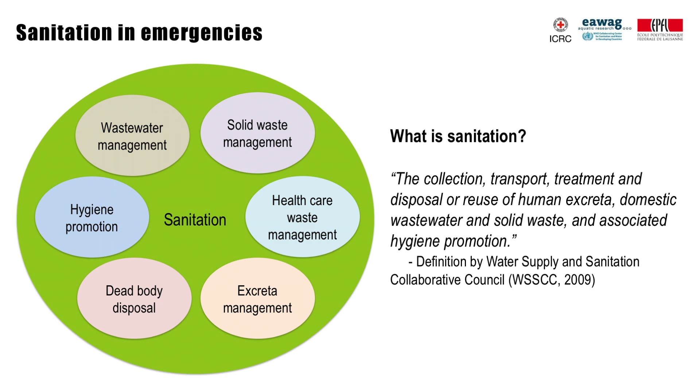There are several different subgroups of sanitation during a humanitarian response, including wastewater management, solid waste and healthcare waste management, excreta disposal, dead body disposal, and hygiene promotion. The definition of sanitation by WSSCC considers excreta, wastewater and solid waste management as part of the sanitation domain. In these modules, we will focus on wastewater management and excreta disposal, meaning all sanitation domains linked to the waste disposal from the use of toilets.

During an acute humanitarian crisis, the protection of public health is the main goal of sanitation. A public health crisis in the form of a cholera epidemic or other feces-related diseases must be avoided. Conflicts of interest between public and environmental health can arise. For example, vacuum trucks might dispose untreated fecal sludge into the environment due to the lack of treatment facilities, in order to get it away from settlements and protect human health.

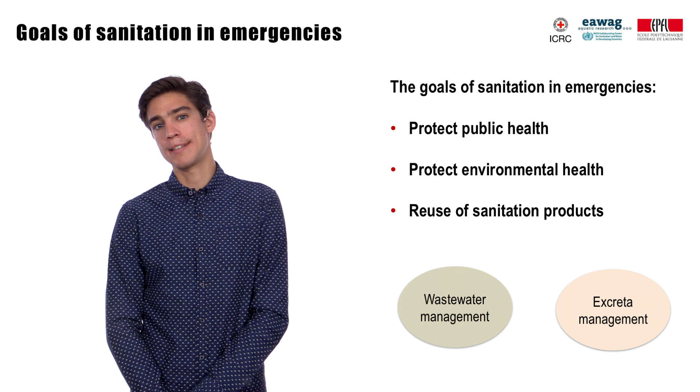While this practice can be justified during an acute humanitarian crisis, the protection of environmental health, along with social, institutional, and economic considerations, should not be overlooked and should be addressed as soon as possible or even integrated from the beginning. Finally, the reuse of sanitation products can become a goal during the post-crisis when new systems are implemented.

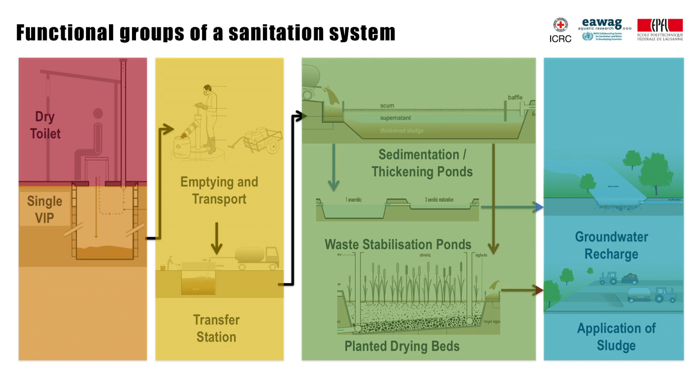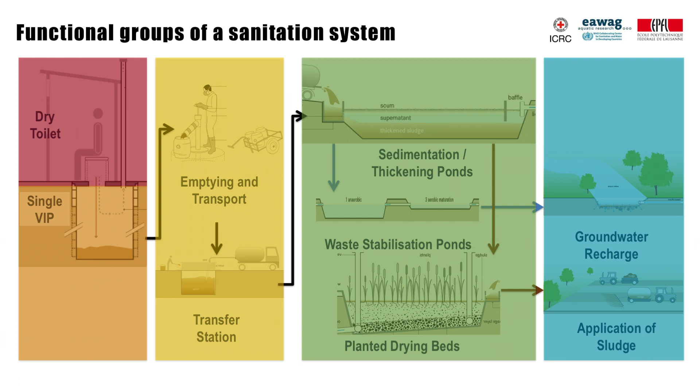In the Compendium of Sanitation Systems and Technologies, we categorize all sanitation technologies into 5 different groups with the color code as seen on the image. A sanitation system always consists of a combination of technologies from several or maybe even all of the 5 different categories. The first functional group is called user interface, meaning the toilet itself, so the interface between the user and the rest of the sanitation system. This can be a dry toilet, a flush toilet, or a urine diverting toilet.

Sanitation products have to be collected and stored on-site in some systems. Therefore, the name of the second functional group indicated by the color orange. There, some treatments can already occur. A widely used technology from this category is the septic tank. In the septic tank, some physical separation of sludge and effluent occurs and some anaerobic degradation. Once the collection technology is full, the sanitation products need to be emptied and transported. This yellow category is called conveyance.

All sanitation products need treatment. Thus, all treatment technologies are categorized in the 4th green functional group, and finally, they can be safely reused or disposed, as indicated by the blue functional group called use and disposal.

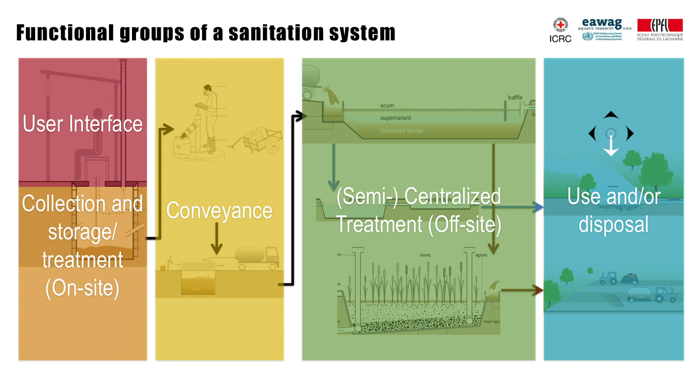During a humanitarian crisis, resources are limited and sanitation systems break down, are inexistent or have been destroyed. It is therefore not feasible to implement a complete sanitation system from the very beginning that takes into consideration all functions. The Sphere standards provide guidance on the minimal standards for excreta management during a humanitarian response. This can help to set priorities and provide minimal services.

There are 2 standards for excreta management in the Sphere guidelines, which we will have a closer look at. The first goal of excreta management is to create an environment free from human feces, meaning that all living areas are free from fecal contamination. The first key action is to implement appropriate excreta containment measures.

With the lack of resources, this can mean a cleanup campaign, the demarcation of defecation fields, and the construction of public toilet facilities. All of these actions have to be implemented in consultation and coordination with the affected community, as they have key information from the ground and will be the ones to use the facilities.

Sanitation facilities have to be constructed away from water sources and not too close to the groundwater table. Locations downstream of rivers or at the bottom of a slope are therefore preferred. The second minimal standard in Sphere is the safe containment of excreta. The standard says that all affected people should have adequate, appropriate, and acceptable toilets sufficiently close to their living spaces to allow rapid, safe, and secure access at all times, day and night.

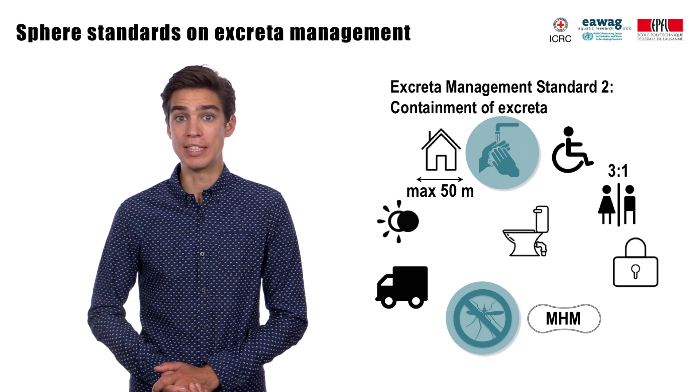Furthermore, it has to fulfill basic hygienic functions such as the possibility for menstrual hygiene management, at minimum through the provision of water and a solid waste bin with a lid. Also, hand washing facilities and avoiding that the toilet becomes a breeding nest for flies and mosquitoes is needed. It should be ensured that the toilets can be emptied when full and that transport, treatment, and disposal or reuse of sludge is warranted. Toilets should not be a source of groundwater contamination.

For public toilets, there should not be more than 50 people per toilet in a female to male ratio of 3:1. However, the goal of any long-term intervention is to provide household toilets which are organized by the community themselves. Many prolonged humanitarian responses require an action plan that goes beyond quick fixes and immediate interventions. A long-term action plan is needed after immediate actions were implemented.

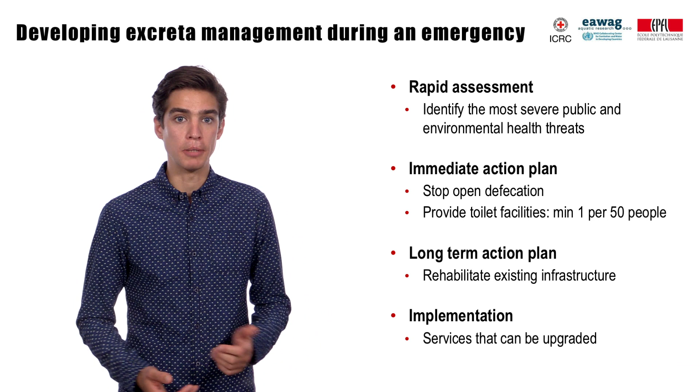This includes the rehabilitation of existing infrastructure or the construction of new ones. Implementation can be done stepwise with services that are upgradable. Constant monitoring is required in order to assure the success of the steps. Especially in the acute phase of an emergency, public and environmental health threats need constant surveillance. The data for monitoring can be gathered through community surveys, observations in the field, and expert interviews.

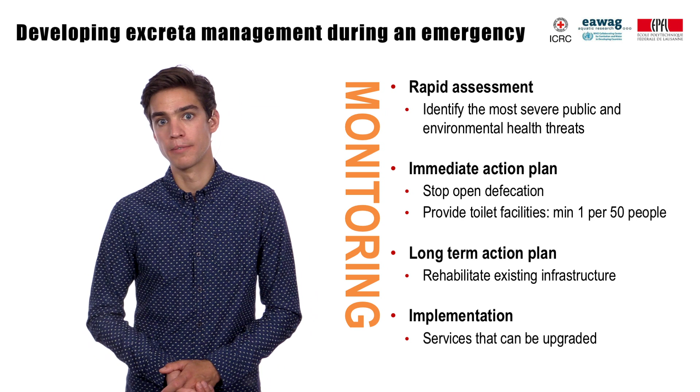As mentioned before, sanitation systems have to fulfill different needs during different phases and types of a humanitarian response, which can require different technologies and services than those needed at a different stage. During chronic crises, these different phases cannot be distinguished and several interventions might have to be implemented at the same time. In the following example, the goal is to show how sanitation systems can be developed over time.

This fictional example of an armed conflict forces a city's inhabitants to flee their houses and resettle in an isolated rural area. Water supply is not yet provided, and the first goal is to provide a quick fix sanitation solution that serves a large amount of people and that safely contains excreta from human contact. The proposed first step is to implement public shallow trench latrines together with hand washing facilities next to the latrines so that the first standard of Sphere can be fulfilled.

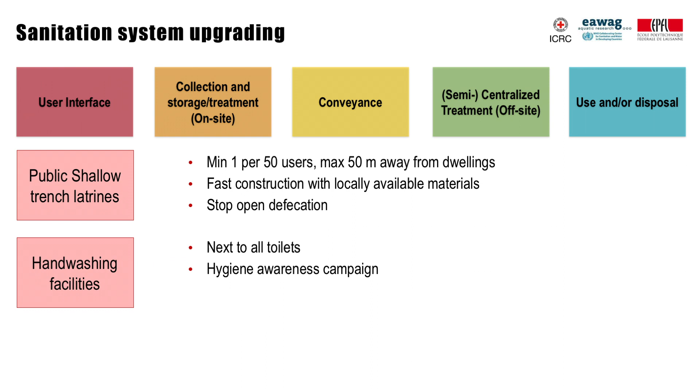These interventions are complemented with a hygiene awareness campaign in order to educate people on public health threats and to stop open defecation. We will develop the system in this example with the terminology of the 5 functional groups from the Compendium. Shallow trench latrines can be implemented quickly using local materials. Little construction work is needed.

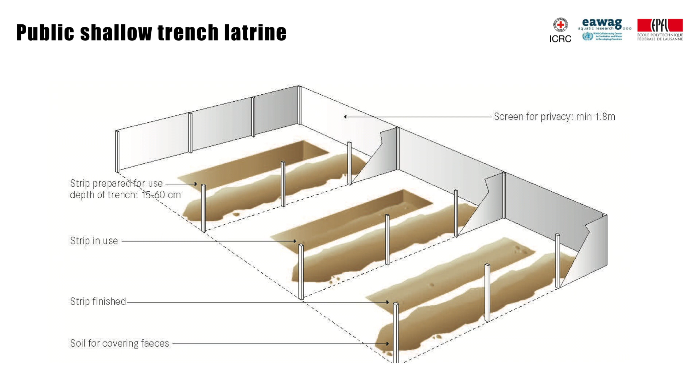The shallow trench latrine will be explained in more detail in a later module. The public shallow trench latrines will fill up quickly and adequate treatment and disposal is needed. On-site lime treatment can help to hygienize the excreta. Afterwards, the trenches are filled and covered and the site must be decommissioned and secured. This will help to prevent human contact with the contained feces in the long term.

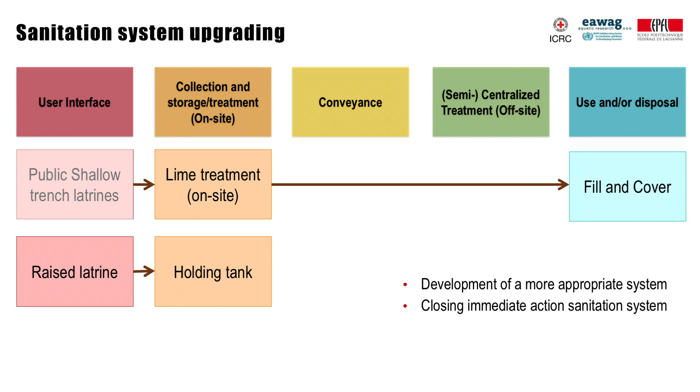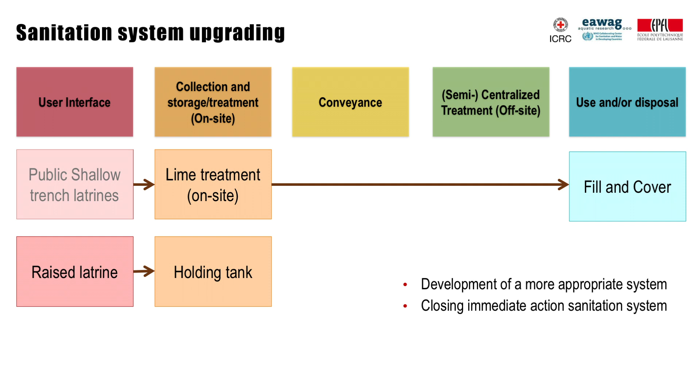After the acute phase is over and more materials, skills and capacities enter the newly formed refugee camp, more appropriate sanitation solutions can be implemented in parallel to the public shallow trench latrines. A raised latrine can be constructed with a holding tank below, as more material like tanks and toilet user interfaces are now entering the affected area or have been produced or organized locally.

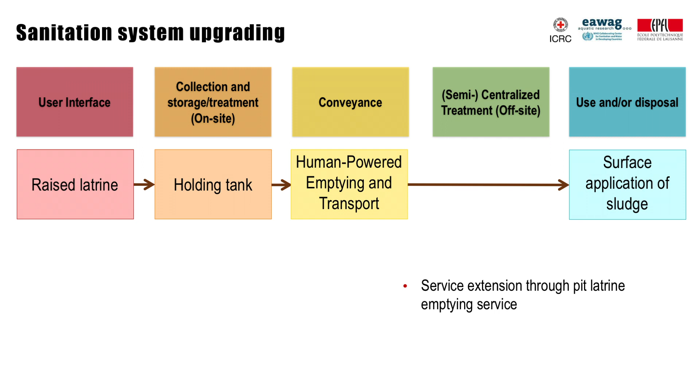This leads to the next extension of sanitation services. The goal now is to provide an improved sanitation system that covers all steps of the sanitation service chain, is appropriate to the urban community living in the camp, and that provides toilets on household level instead of public toilets. Furthermore, the system needs to be upscalable and resilient to future acute humanitarian responses. Therefore, pour flush toilets are constructed at a household level, as the urban community is used to water-based sanitation systems and will not accept dry sanitation systems in the long term.

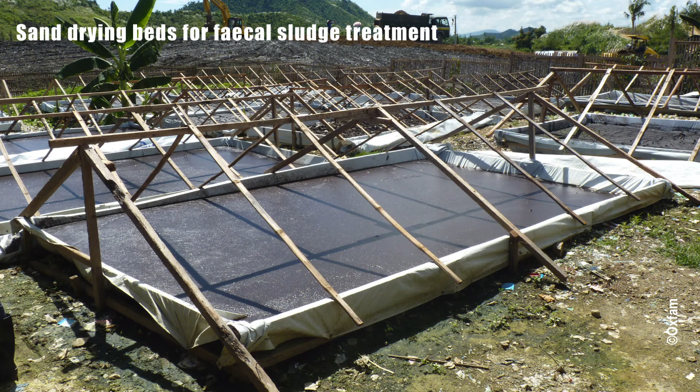Septic tanks are constructed in a first step. To treat the sludge from the septic tank and the holding tanks, unplanted drying beds are constructed before final disposal in the form of now safe surface application of sludge. The effluent from septic tanks is disposed in the ground without treatment at this point. As an intermediate step until unplanted drying beds can be constructed, some short-term sludge treatment facilities can be implemented, such as sand drying beds like the ones on the image behind me, implemented by Oxfam during the 2014 emergency response in the Philippines.

Finally, a simplified sewer can replace transport of the effluent from the septic tank to treatment in waste stabilization ponds. The raised latrines can still be used in public places such as schools, markets, health centers, etc.

Please note, due to time constraints, that we only talked about the technology part of the sanitation system. However, as you know, a sanitation system not only consists of hardware but also software. This has to be developed as well. Users need to be informed and involved, staff needs to be trained, financing of the system has to be secured, including for operation and maintenance. All of this takes time and resources and has to be taken into account. This example shows just one way of how a system can be developed. This development always has to be based on many different criteria in order to select the best fit and the most appropriate system. The criteria will be introduced in more detail in another module.

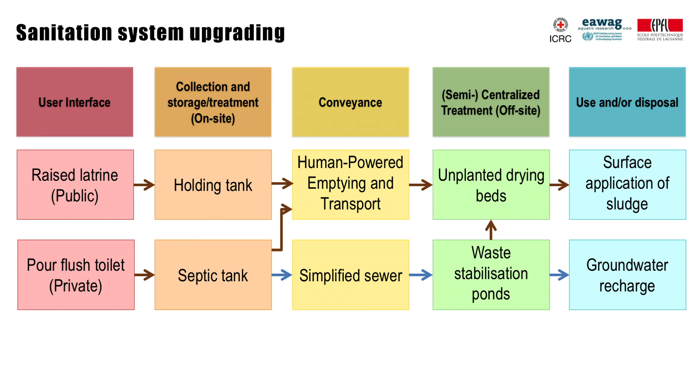In this module, you have learned why sanitation service delivery is crucial for maintaining public health during humanitarian crises. You've learned about the different functional groups that are needed for full sanitation service delivery. We then had a look at the Sphere standards for emergency excreta disposal. Please remember that these standards are minimal standards for an acute humanitarian crisis and that implementing them will not provide a complete sanitation system. You will have to upgrade the sanitation system over the course of a humanitarian response as the needs will change and there is no one-size-fits-all solution to sanitation. We had a look at one fictional example on how to develop a sanitation system over time. I hope you've learned a lot.